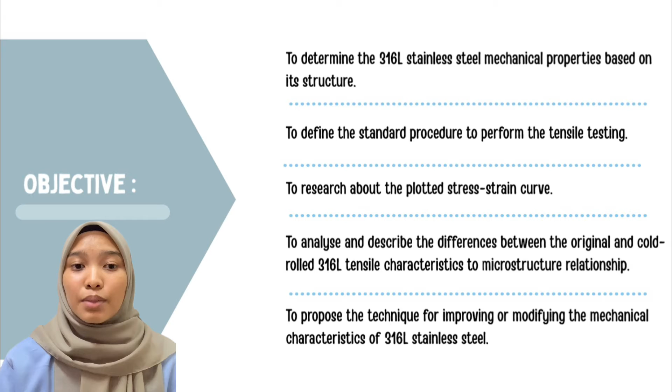Third, to research the plot of the stress strain curve. Fourth, to analyze and describe the difference between the original and cold-rolled 316L tensile characteristic to microstructure relationship. Lastly, to propose the technique for improving or modifying the mechanical characteristic of 316L stainless steel. Now we will continue with the problem statement.

Compared to chromium nickel austenitic stainless steel, 316L stainless steel offers higher creep, stress rupture and tensile strength at elevated temperature. There are two options of supply of 316L stainless steel to be considered, which are original 316L stainless steel and cold-rolled 316L stainless steel. By reporting the performance of 316L stainless steel raw material based on the tensile test experimentation,

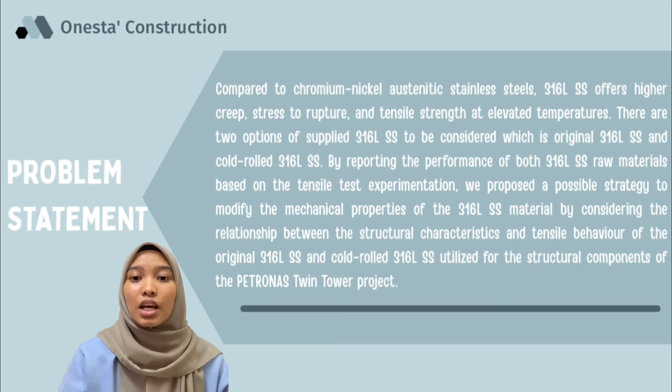we propose a possible strategy to modify the mechanical properties of 316L stainless steel material by considering the relationship between the structural characteristic and tensile behavior of the original 316L stainless steel and cold-rolled 316L stainless steel utilized for the structural component of the Petronas Twin Tower project. To determine the performance of both materials, original and cold-rolled 316L stainless steel, both specimens will undergo tensile tests until they deform under tension up to fracture.

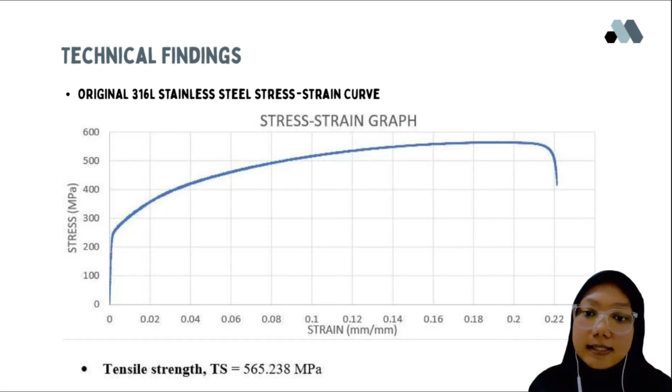So the diagram shows the stress strain curve of original 316L stainless steel 2.0 mm, constructed until its maximum load of 10.386 kN up to its fracture. By determining the maximum stress, the tensile strength obtained is 565.238 megapascal. By using the same curve, the modulus of elasticity is 232,800 megapascal.

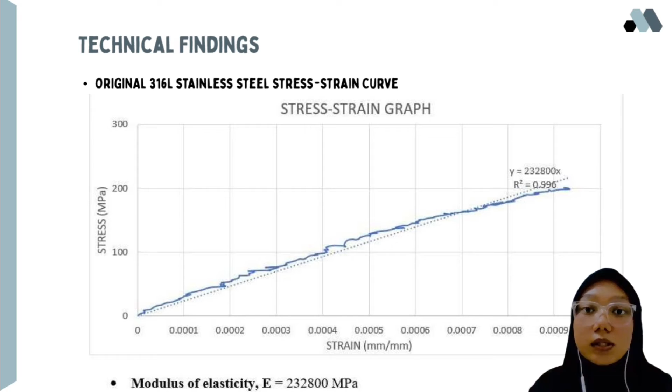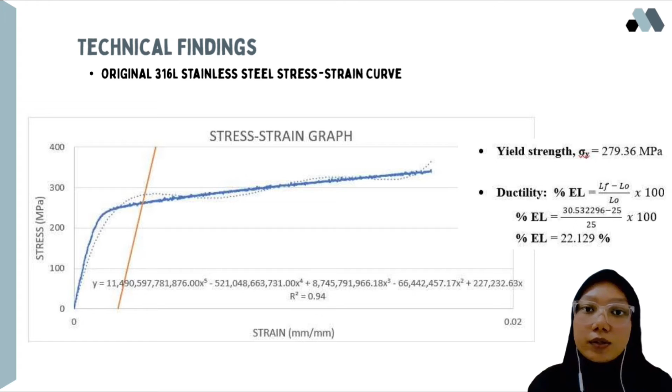To determine the yield strength, a line is drawn parallel to the elastic slope line with an offset of 0.2%. The yield strength obtained from this curve is 279.36 megapascal, while the ductility percentage calculated is 22.129%. Next, for the cold-rolled 316L stainless steel 1.0 mm stress strain curve. The curve is constructed up to its maximum load of 8.025 kN.

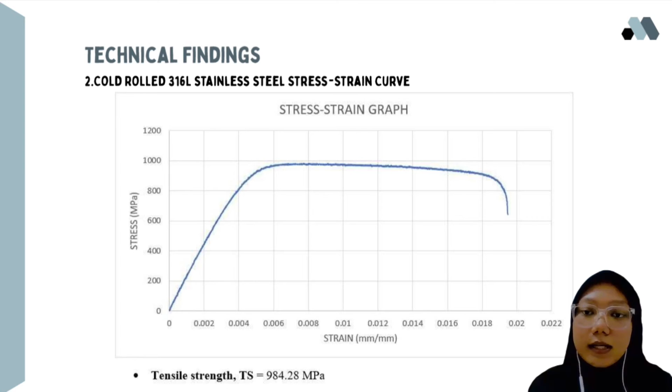From the curve, by determining the maximum stress, the tensile strength obtained is 984.28 megapascal, while the modulus of elasticity is 207,863 megapascal. By using the same method as the original 316L stainless steel, the yield strength obtained from this curve is 976.956 megapascal, and the ductility percentage calculated is 1.948%.

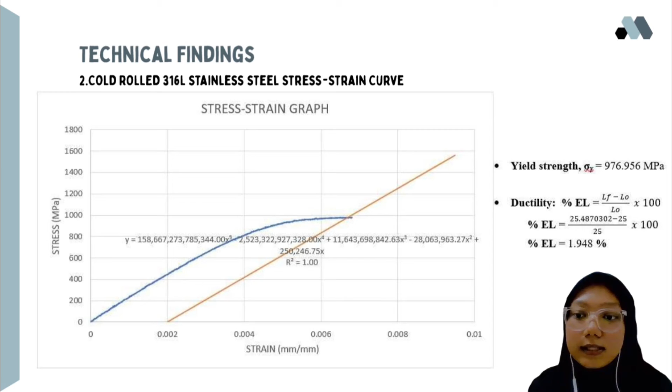In expansion, cold rolling is a sort of metalworking that is used to decrease the thickness of metal sheets. Cold rolling can be utilized to create high-quality surface finished sheets, strips, and foils. The tensile strength of cold-rolled 316L stainless steel was higher than the original 316L stainless steel. The increase in cold-rolled 316L stainless steel strength and hardness may be due to the presence of microstructure dislocation and heavy plastic deformation.

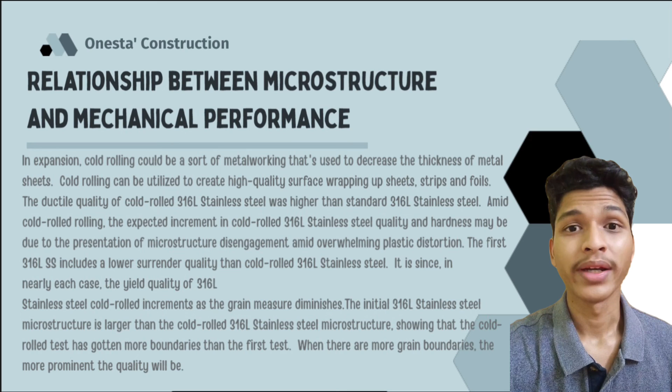The original 316L stainless steel has a lower yield strength than cold-rolled 316L stainless steel. It seems in nearly each case the yield strength of cold-rolled 316L stainless steel increases as the grain size diminishes. The original 316L stainless steel microstructure is larger than the cold-rolled 316L stainless steel microstructure, showing that the cold-rolled sample has more grain boundaries than the first sample. When there are more grain boundaries, the greater the strength will be.

In conclusion, cold-rolled 316L stainless steels are better as their mechanical properties and tensile properties are improved. Next, by comparing both samples of the original and the cold-rolled 316L grade stainless steel, the obvious difference between them is the size of grain. Lastly, as the metal is shaped at a lower temperature, the steel's hardness, resistance against tension breaking, and resistance against deformation all increase due to work hardening.